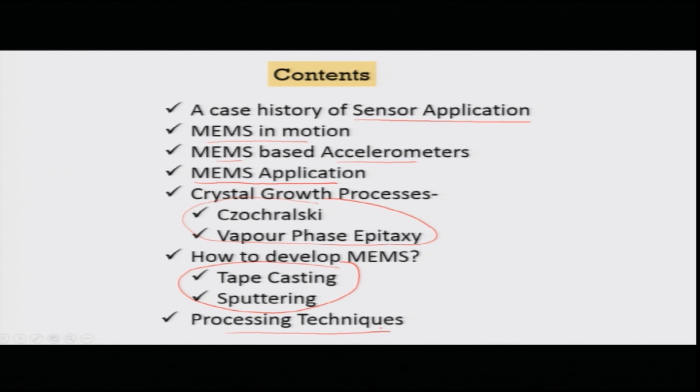So, let us start with the evolution of sensors in the automotive industry, because MEMS has a very interesting relationship with it. As it happened, till 1960, as you can see in some of these classic automobiles, radio was the only electronic system, and the engine system was controlled entirely mechanically.

But these conventional mechanically actuated ignition and fuel systems were not good enough to control the combustion process. So, as a result, there were a lot of emission related issues. If you go back to history, you would see that by that time most of the cities of Europe got heavily polluted by the emissions from automobiles. So, then there came strict rules in terms of controlling the combustion process. Now, how do you control the combustion process and the exhaust emissions in automobiles?

When people started thinking, the concept of electronic ignition system came into picture. We have seen one of the most sophisticated electronic systems today in the last class on piezoelectric injection systems. But other than that, you would also need crankshaft position sensors, camshaft position sensors, for controlling the combustion process, airflow rate sensor, gas sensor at the exhaust, throttle position sensor, and above all a microcontroller to control the ignition. So, development of all these things actually brought us today's car that we see in the market.

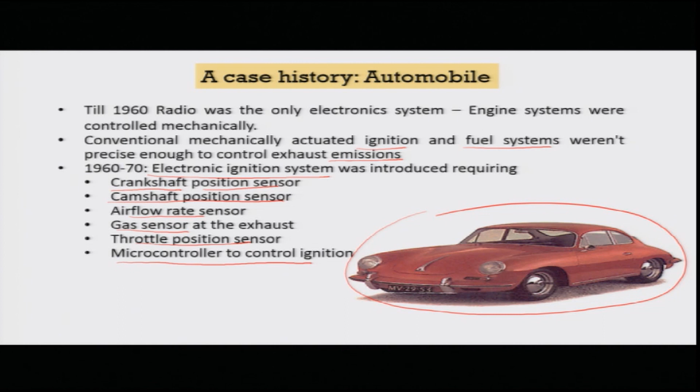But the development never stops. In fact, after the 1970s thrust of developing these basic sensors for controlling the combustion and emission process, the next goal became the anti-lock braking device, because many times while applying the brake, there is this sliding problem which used to create a lot of accidents. So, sensing the locking of the wheels which creates this problem, and accordingly modulating the hydraulic pressure, brought forth the development of the anti-lock braking device.

Once that is done, people thought, okay, we can now control the braking force by modulating the hydraulic pressure. How about controlling the acceleration also, because that can help when I am accelerating and the vehicle is slipping. So, then came the traction control system, which senses slippage during acceleration and modulates the power to prevent the slipping. Then there are much more advanced systems that have been developed, like vehicle dynamics control and millimeter wave radar technology with GPS based traffic updating.

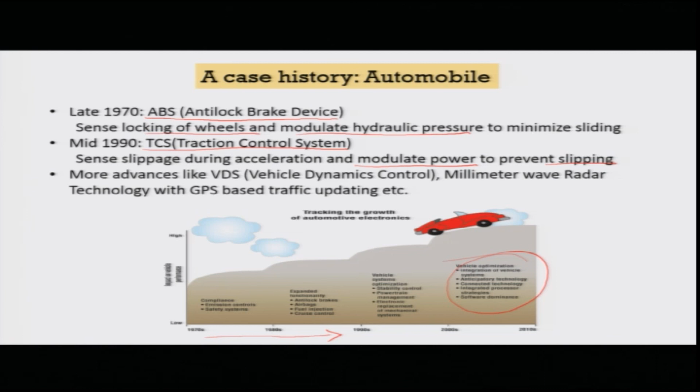So, all these things, as you can see, starting from the 1970s as the development happened, we have now well crossed this domain, where vehicle optimization, integrated processing, software development, all these things have taken place, and the automobile is more of a computer and electronic system now than a mechanical system.

Now, one of the fantastic final developments in this direction, which also has a very interesting similarity with our development of smart materials, is the development of the intelligent car. You must have seen Google's Waymo car, also there is Tesla's car. There are many such cars which we today call self driving cars. Now, what are the important technologies that are there in self driving cars?

Well, they have radar, they have the laser light, they have GPS, odometry and computer vision. So, whatever input goes into the driver's brain, all these things are being collected through these kinds of sensors. But then finally, you have to also simulate the brain. So, then there comes the artificial intelligence also integrated into the system.

Now, there are several stages of this autonomous driving. These actually landmark our journey from automated system to autonomous system. Automated systems are systems where sensors are there to help mankind, but when I come to autonomous system, the system becomes intelligent enough that it takes its own decision.

Level 1 of autonomous vehicle driving is called hands on, where the autonomous system and the driver work together, for example, adaptive cruise control. So, both of them are helping each other. But in the hands off system, that is level 2, the autonomous system takes care of all the important things like braking, acceleration, steering. However, human contact is necessary for any emergency takeover.

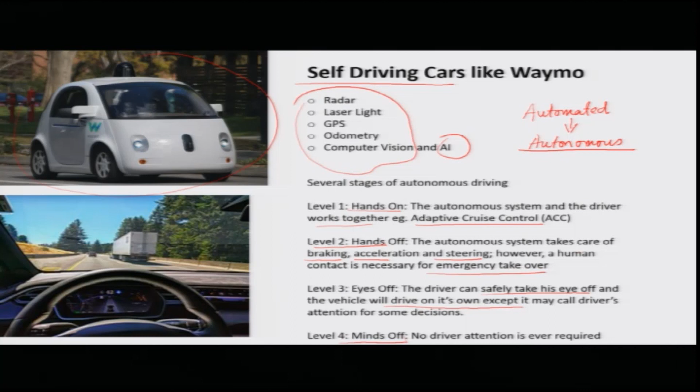Now, why do we go for these MEMS, which is micro-scaled electromechanical systems? Well, the advantage of such systems over any macro-scale system is that they have low power consumption, high sensitivity, and are easy to integrate and communicate with. They have low noise and high machine precision, and of course, because the development of MEMS has been paralleled with the development of ICs, chips, etc., in terms of mass fabrication the cost has come down. It has decreased the cost enormously.

In fact, if you look at the market of accelerometers, you would see how much it has been affected by the development of MEMS. MEMS based accelerometers are very cheap, maybe only $2 to $3, and their counterparts, the traditional accelerometers, are 100 times more expensive. So, the integration of IC technology has actually made this advancement and reduced the cost of MEMS.

Now, the most common application of MEMS is accelerometers. Accelerometers are devices that measure acceleration based on certain changes in the system. If it is based on capacitance, it is capacitive sensing. It may be based on piezoresistivity. It may be based on piezoelectricity, where PZT type materials are used, or on optical interferometry or thermal expansion.

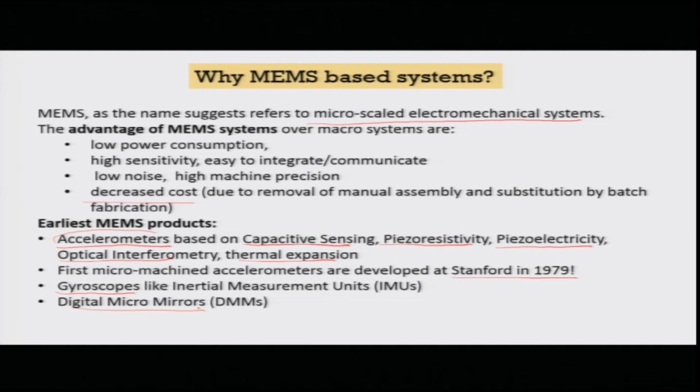The first micromachined, or MEMS based, accelerometer was developed at Stanford in 1979. So, you can imagine the MEMS endeavor has been here for quite some time, and yet today many advancements are happening because of advancements in material science also. Gyroscopes are the second one after accelerometers, and then the digital micromirrors. There are many such products, and there are MEMS in other domains also, as we will see.

Now, if you look at the MEMS based accelerometer first, and look at the fact sheet, let us say it is a capacitance based system, then what is this capacitor? You need a parallel plate capacitor, right. A piezoelectric material is also a parallel plate capacitor. You can also develop various other types of parallel plate capacitors.

Now, in a parallel plate capacitor, the capacitance is defined in terms of the absolute permittivity epsilon 0, the relative permittivity, the plate common surface area and the plate separation distance. Okay. So, that is the relationship of the capacitance in the system. That means this capacitance will vary if I vary the parameters. Epsilon 0 is the absolute permittivity of free space, which of course you cannot control, but if you control the distance between the plates d, you can change the capacitance.

If you control the shared area of the plate A, you can do that. If you control the dielectric constant, you can do it. Now, in many cases we try to use any one of these strategies by attaching such a system with some kind of a base motion, because if there is a base motion, then either there will be relative displacement between the two, they will be coming closer or away, or you can also design a motion in which they will actually shear away from each other, one away from the other. So, that way the capacitance will change, and change of capacitance can be interpreted in terms of change of voltage.

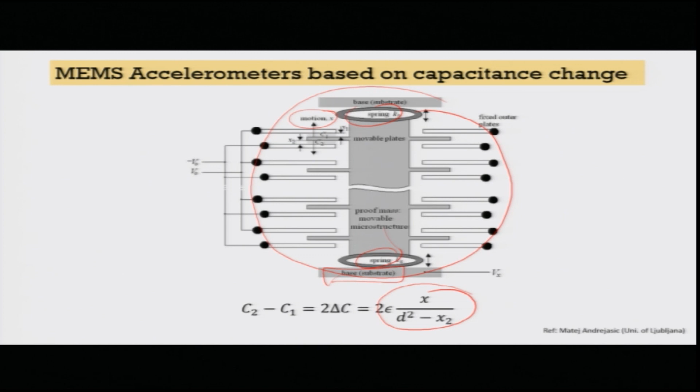So, this is one such device where there are many capacitors, as you can see in this system, and there is a base at the two edges with springs attached to it. The base is basically passing the motion to the MEMS system, and the MEMS system has many such capacitors inside. Each capacitance is related to the displacement or motion x by this simple relationship. You can work it out, and the integrated effect of this change gets reflected as a significant change in voltage of the system.

Now, MEMS based actuators are abundant in various applications, like the automotive sector. Other than the throttle sensors, the camshaft and crankshaft position sensors, etc. that I have talked about, we also need actuators for the airbag system, which is MEMS based, automatic door locking, active suspension. These are all actuators developed based on MEMS systems. In the consumer sector, you have computer peripheral devices, mouse, etc., which are MEMS based, subwoofers and sports training devices. There is one very nice example of sports training devices I will talk about.

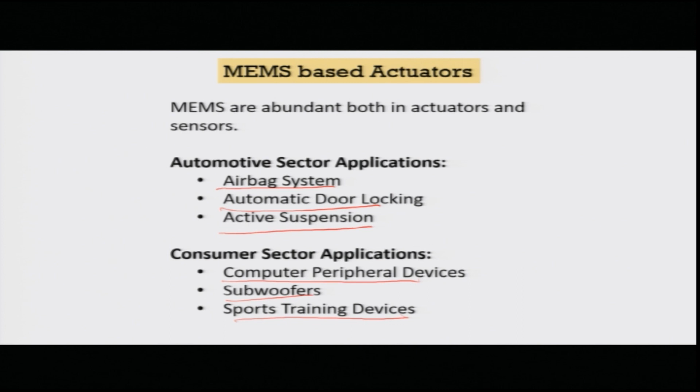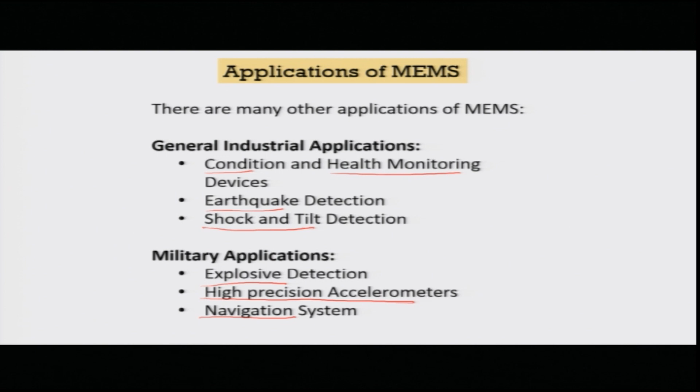Now, MEMS based systems in general industrial applications are there for condition and health monitoring, very important, where the MEMS devices give us ideas about the identification of damage, detection of damage, extent of damage, damage prognosis, etc., and then detection of earthquake, shock and tilt detection. These are for general industrial applications. There are some military specific applications like explosive detection, high precision accelerometers and navigation systems. So, in all we can see that MEMS have a very important role in various applications.

This is the one I told you about, where MEMS has an application in exercise control. You can compare its size with this 10 cent coin. So, it is quite small, and this is a full fledged device. It has a sensor, a processor and everything. It senses the level of stress applied on the limb of a person during exercise, the microprocessor controls the whole thing, and it gives a visual warning that indicates whether there is over exercise or not.

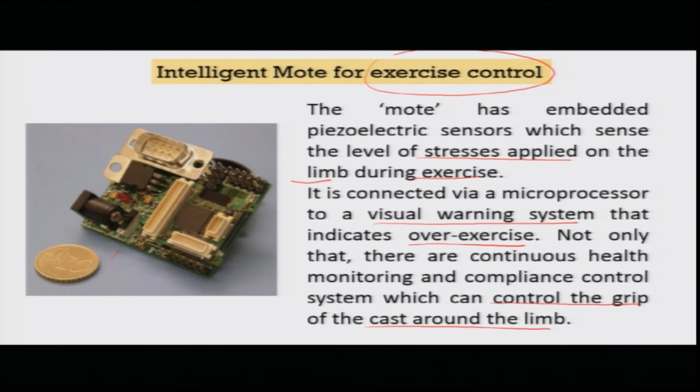Not only that, if there is a continuous health monitoring and compliance control system attached with it, that can control the grip of the cast around the limb, and can also give information to the physician about the level of exercise, etc.

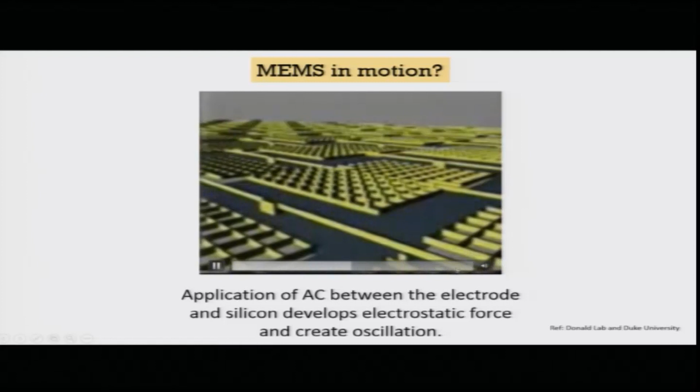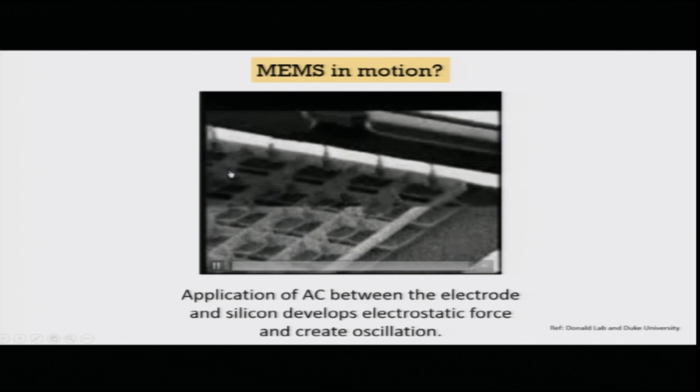Now, MEMS can also be used for motion sensing, like accelerometer based systems. So, here is an example: at the micro scale you can develop so many systems, and you can see how each one of them can be nicely controlled and synchronized, and through that you can control many things, optical mirrors and various other types of devices including accelerometers, etc. This system has been developed to create such oscillations. That is one of the applications of MEMS systems.

This concept can also be used for the control of an optical mirror, because optical mirrors in space applications, particularly space telescopes, are used to compensate the delays from various telescopes. So, if you have many such motion control systems, as you can see at the back side of each one, then you can individually control the focusing of the system and actuate each one of them with the help of a PZT actuator.

If you remember that buzzer experiment, this is, you may say, a kind of many integrated buzzers together. So each one of them, you can actually actively control the optical aperture of the system.

The issues related to MEMS development, we generally put in a hierarchy of 3 stages. The first stage of MEMS development is related to system level development, where we have to develop systems for signal processing, for networking, for packaging, design, and simulation of the system.

Then below that level we have the micro engineering issues. For example, how would you do the layering, micromechanics, microelectronics, photonics, micro molding; all these issues come. And even below that we have the materials. In that core material you may have smart materials included.

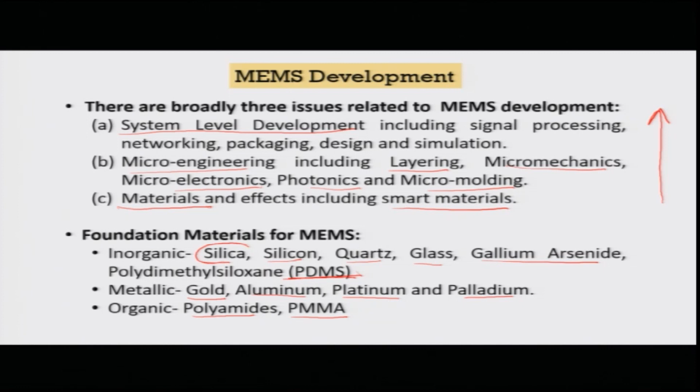Metal-wise, you have options like gold, aluminum, platinum, palladium, and from the organic side, other than PDMS, you have polyimides and PMMA, polymethyl methacrylate. So there are quite a few of them, but our first choice is generally always silica and silicon. Now, why is silicon the first and best choice for us?

For signal transduction, you can make p or n type semiconductors that can be readily integrated with a silicon substrate. So you can develop various semiconductors also. In fact, the semiconductor industry helped the growth of silicon. The melting point is around 1400 degrees centigrade, so it is thermally quite stable for most engineering applications.

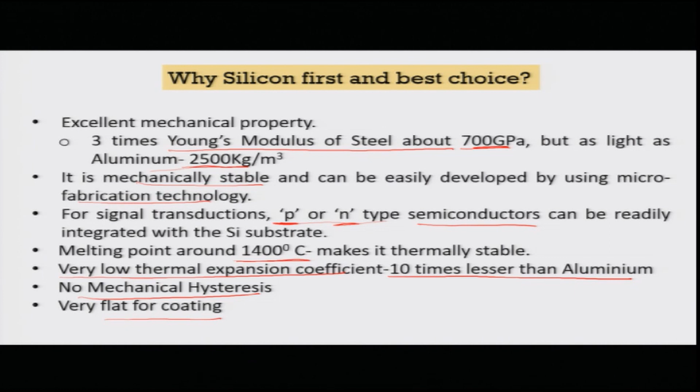Not only that, it has a very low thermal expansion coefficient, 10 times less than aluminum. At a smaller scale, the way it helps is that if there is thermal expansion in the system and the other parts of the system are not expanding, then thermal stress will generate in the system. The chance of such generation is much less in silicon. It has no mechanical hysteresis and it is very flat for coating. So, all good reasons for silicon to be the most important MEMS material.

Now, if you look at the crystal structure of silicon, it is basically FCC, but how many atoms will this FCC structure have? You will have one at each of the corners: 1, 2, 3, 4, 5, 6, 7, 8. So 8 of them, and also one at each face center, so 6 of them. So 14 atoms. However, silicon has 4 additional atoms accommodated within this unit cell. So it has 18 atoms.

That makes it anisotropic in nature; in some directions the density of atoms will be less, in some directions more. In fact, the 100 plane is the weakest one, and the 111 plane is the strongest one. To know about these 100 and 111 planes, you have to go through my course on nature and properties of materials.

I will not discuss these things here, but in a unit cell, if you have 8 atoms at the corners, each one is shared by 8 such cells. So for one cell it is equivalent to only 1 atom, and similarly the 6 face atoms, shared by 2 cells, count as 3. So 3 plus 1 is 4, and it has 4 extra. So each cell has 8 atoms. That is the crystal structure of silicon.

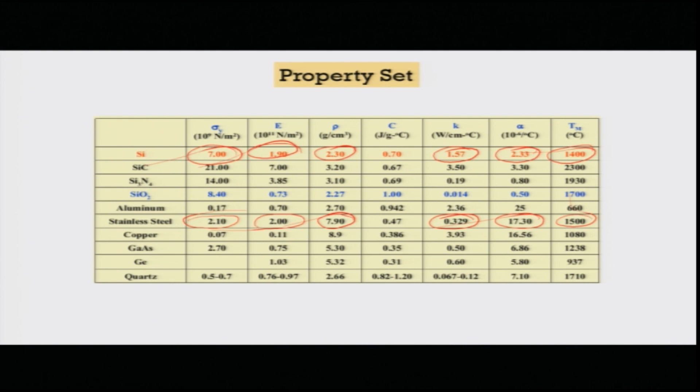Now, that gives the properties that we can see. For example, you can see what is the yield stress, you can see the modulus of elasticity, and you can compare every time with this stainless steel, which you know very well, in order to get some idea: density versus density. You can also compare conductivity versus conductivity, thermal expansion coefficient versus thermal expansion coefficient, and temperature stability wise. So, you would see that with all these materials, silicon is no doubt at the top of the table.

Now, how do I develop pure silicon crystal? There are 2 processes. One is called the Czochralski crystal growth process, in which what we have is the raw silica and then a silicon carbide. Then we heat it up, and with the help of a seed we develop silicon, and that silicon crystal grows. We have to continuously rotate it and also move it, so that the silicon gradually grows, and we have to also take out the silicon oxide and carbon monoxide gases. The pulling rate is very critical, so that uniformly you get a big crystal out of the system.

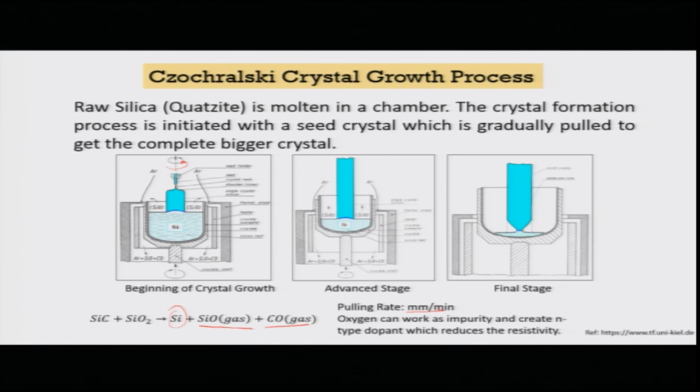There is another way which is a more industrial way of doing it, called the floating zone crystal growth process. It is also used in Terfenol-D, magnetostrictive materials, similar floating zone techniques. So, what we have in the floating zone crystal growth process is that we have basically in this system a high purity polycrystalline rod and a monocrystalline seed crystal. That monocrystalline seed crystal actually goes from bottom towards the top.

And what happens is that the polycrystalline part, by using radio frequencies, is partially melted, and we are pulling this monocrystalline one, so that the single crystal structure is continuously getting formed till you take the whole thing up. So, that is the float zone crystal growth process. This is very much industrially applied.

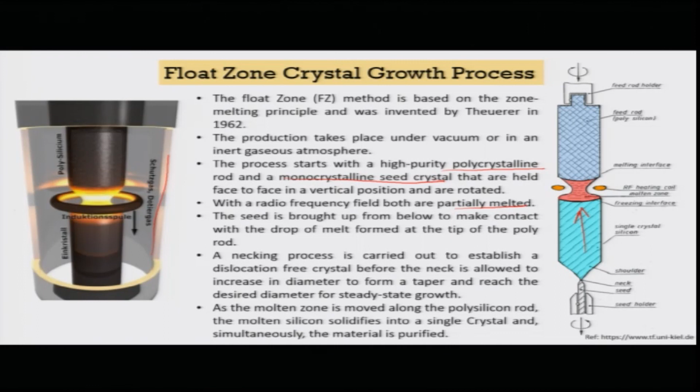The other process is that you make a vapor and let it pass through a substrate, such that an epitaxial layer grows on the substrate with the same crystallographic orientation, and the substrate actually acts just like a seed. In this case, instead of the seed moving, here the substrate is fixed, and the gas that you are passing is actually the vapor phase that is depositing. It is kind of similar to the chemical vapor deposition process.

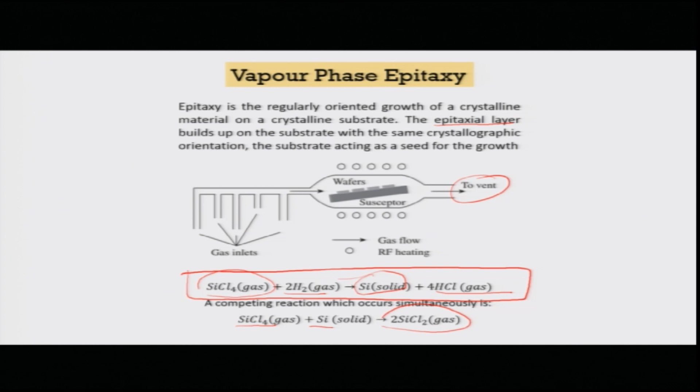So, similar to that, here SiCl4 gas, for example, with a carrier gas will create silicon. This silicon will get deposited and HCl gas will come out from the vent. Now, while this is happening, this reaction also has the opposite side, that is SiCl4 with silicon can create SiCl2 gas, but by suitably controlling the reaction constant, we have to stress more on this growth happening, so that more silicon is deposited on the system. This is what is called the vapor phase epitaxy method for development of silicon.

Let us say we have silicon now in our hand, that is the most fundamental material that you need for MEMS development. Now, what to do? We have to develop a micromechanical system out of it. So, there are 3-4 common processes. One is called bulk micromachining. In this process, we actually remove materials from the bulk substrate, from the block of silicon, by wet etching, by chemical reactions, or by dry etching where we use corrosive gases, or we use wafer bonding.

In the case of wafer bonding, it is very much similar to laminated composites. We actually develop thin wafers and then we align these wafers and develop the stacked structure, just like we have done, if you remember, for the stacked piezo actuators and things like that. So, we stack one after the other in order to form such a system.

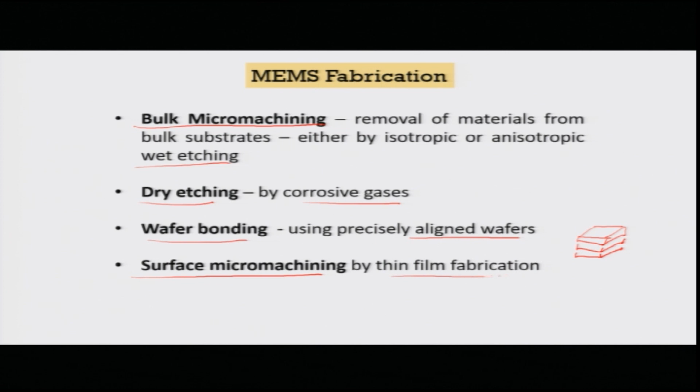We also carry out surface micromachining instead of bulk micromachining, where instead of the entire volume, only the surface is machined by the thin film fabrication process. So, this is one such process, as you can see, it is called the tape casting method. What you do here is that you start with a ceramic powder, solvent and deflocculant.

This mixing you ball mill for 24 hours. Along with that, now you add plasticizer, binder, cyclohexanes and you ball mill it again for another 24 hours until you get this slurry 2, that is the green slurry. Then you tape cast it, as you can see that you are actually tape casting the system here, and de-air it.

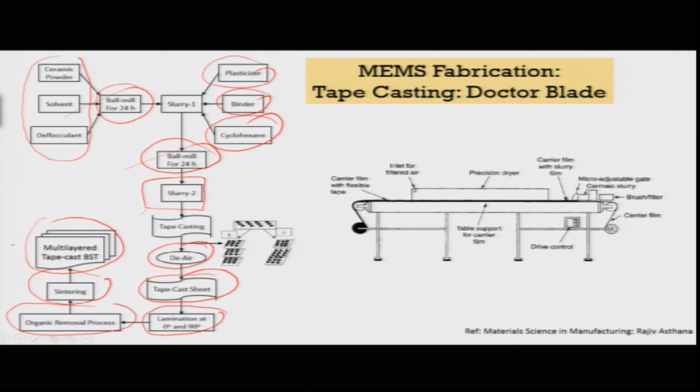You are going to get the tape cast sheet and you can carry out the lamination at 0 and 90 degree, and you heat it up, the organic removal process will start, sinter it further, and you are going to get a multi-layered tape cast system. So, that is the way it is done in this particular case. This is one way of MEMS fabrication.

The other way is that we actually sputter. When we say sputter, we mean that we deposit thin films of a material onto a surface. For example, first create a gaseous plasma of the material that you want to deposit and then accelerate the ions from this plasma into some source material or the target. The source material is eroded by the arriving ions via energy transfer and is ejected in the form of neutral particles, either individual atoms, clusters of atoms or molecules.

As these neutral particles are ejected, they will travel in a straight line unless they come into contact with something. Now, if a substrate such as a silicon wafer is placed on the path, it will be coated by a thin film of the source material. So, you can either directly sputter, or you first make an ionized gas, and that gas will hit the source, and that source will generate the so-called neutral particles, which get deposited on the silicon substrate.

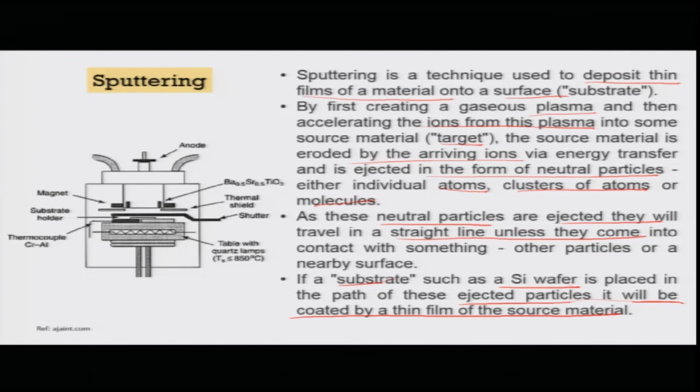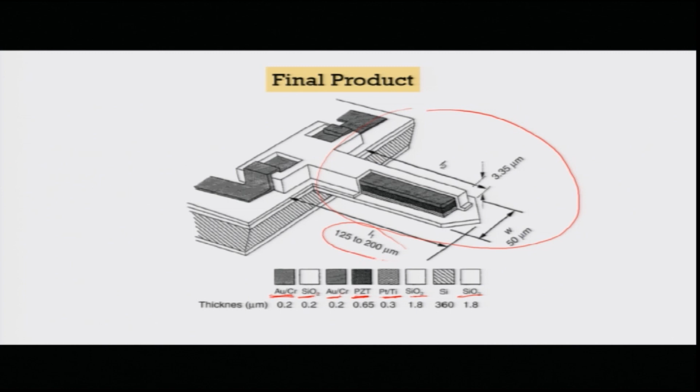So, you can make a functionally graded structure, you can make a smart structure, all in micron scale. You can see the length is 125 micron, width is 50, depth is only 3.35 micron. It is fascinating, this kind of development using smart materials. The processing techniques can be polymer processing techniques.

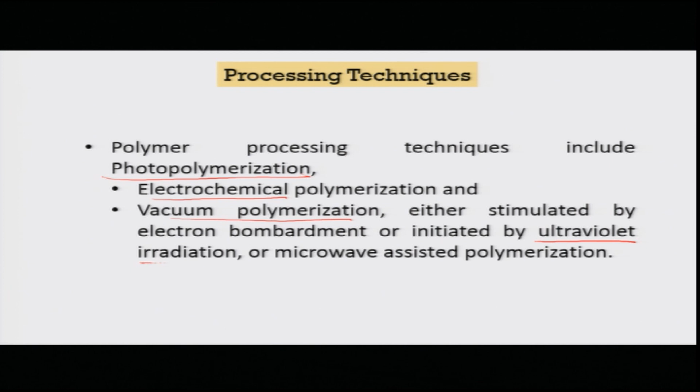One of the important polymer processing techniques is called photopolymerization. There is also electrochemical polymerization, or vacuum polymerization. This is stimulated by electron bombardment on the system, or initiated by ultraviolet irradiation, or microwave assisted polymerization.

Now, in photopolymerization particularly, photo initiation first happens, and as these radicals are formed, they first work on the monomers, then the monomer becomes a dimer, and this continues until you get termination in terms of a polymer. So, this is used for structural polymers.

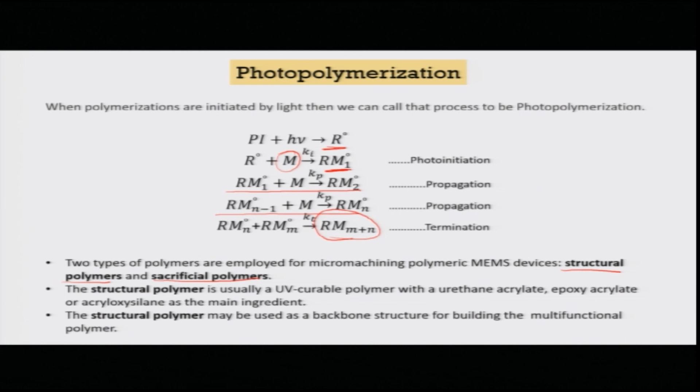Similarly, one can use it for sacrificial polymers. Structural polymers are the building blocks, but sacrificial polymers are only needed temporarily until you build up the structure. Then you dissolve it in a caustic soda solution, so that the sacrificial polymer goes away and the structural polymer remains in the system. So, you generally get a 3D structure out of it.

Now, you can use various such polymeric systems to develop MEMS. PVDF, for example, is based on piezoelectricity, polypyrrole based on conductivity, fluorosilicone based on electrostrictivity; silicone and polyurethane, all three are based on electrostrictivity and generally used in actuators, whereas the first two are generally used for MEMS based sensor systems as well as in some cases for MEMS based actuator systems.

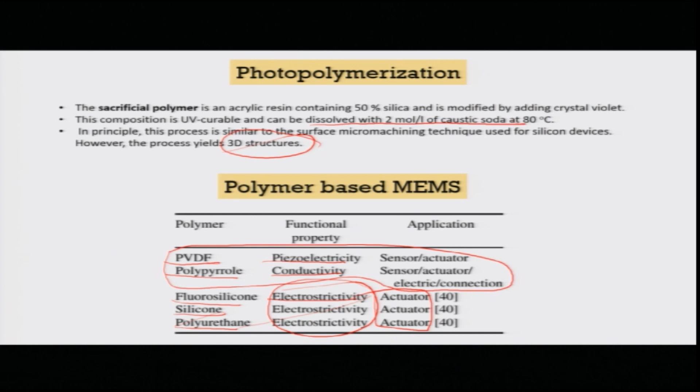So, this is where we will put an end. In the next lecture, we will learn about energy harvesting. We will see what energy harvesting is, its applications, piezoelectric energy harvesters, energy conversion and a basic concept of such a system. So, that is what we will do in the next class.